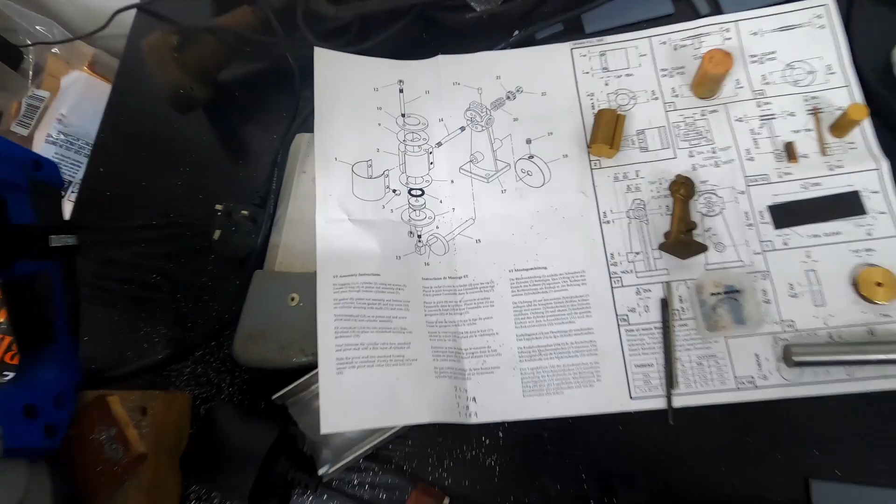So next up, I'm going to take a look at the main body here. Looks like it's probably likely to be the most difficult part. It's just a case of working out how to hold it and the order of operations.

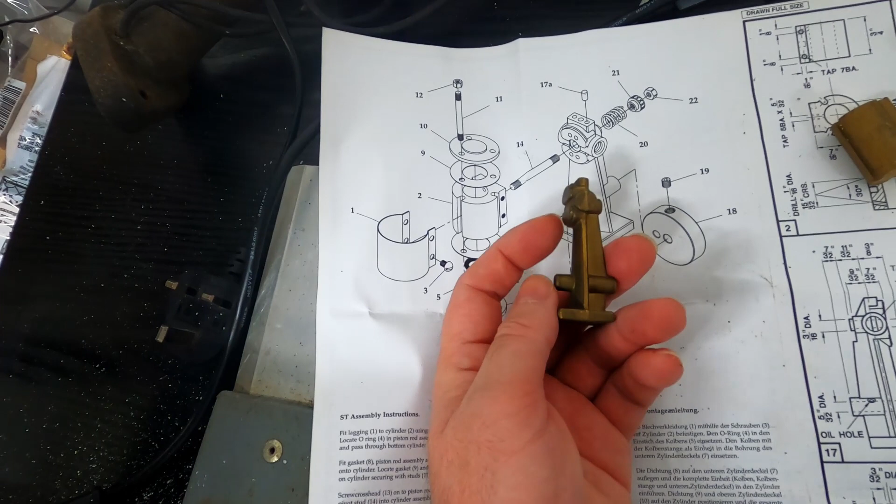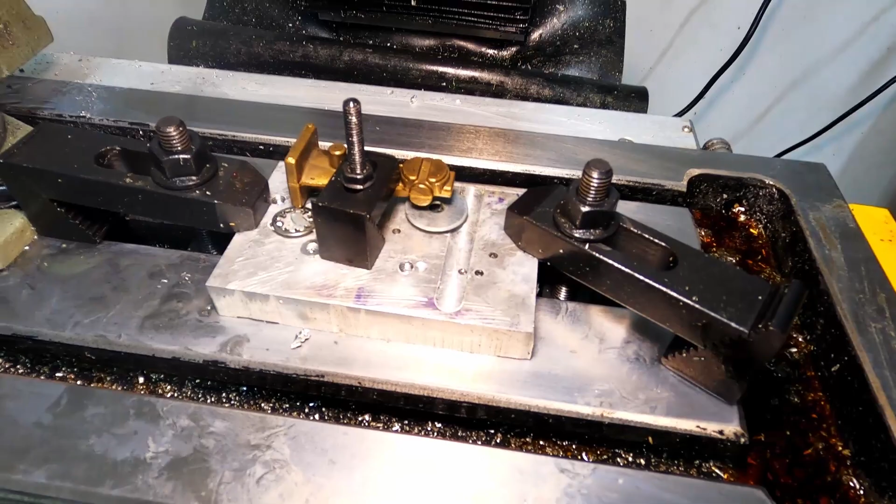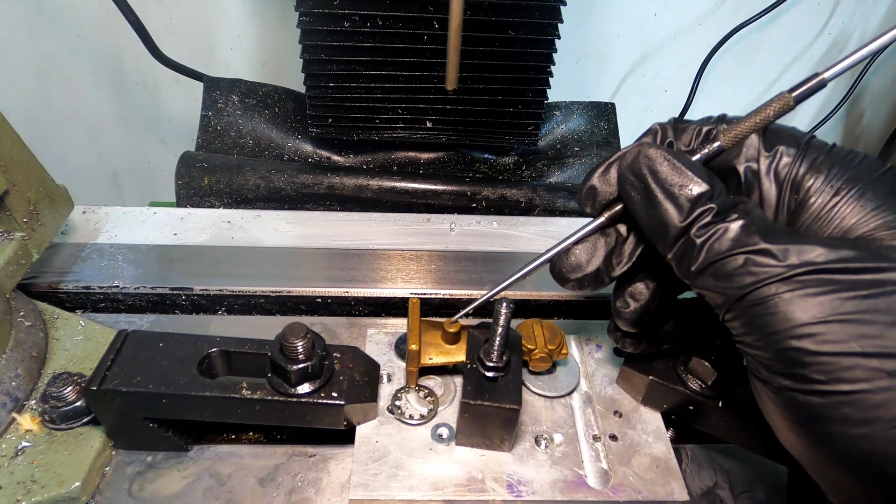Okay, so I have the main body clamped down to a bit of scrap aluminium on the bed of the mill. And I've lined it up so roughly the center of this feature here aligns with the center of this width here, because there needs to be a hole drilled through here and a hole drilled through the center of there, a specific distance apart into the middle of the part.

So I've got this as vertical as possible, so hopefully it does come out in the middle of the feature the other side rather than out the edge of it. So the aim here in one operation will be to drill a hole through this feature, which is where the crankshaft goes through, drill a hole through this feature here, which is where the piston rotates, which means both of those bores or holes will be aligned with each other,

and then in the same setup skim these top surfaces here so that they're exactly 90 degrees to the hole, so that the cylinder has a good fitment to that, and then cut this off as well to the right height in relation to this. And then what I want to do is trim the ends and trim the bottom so that I then create reference surfaces in relation to these holes. And I think that's the only operations I need to do in this setup.

Yeah, well, this can only go well. Olive oil.

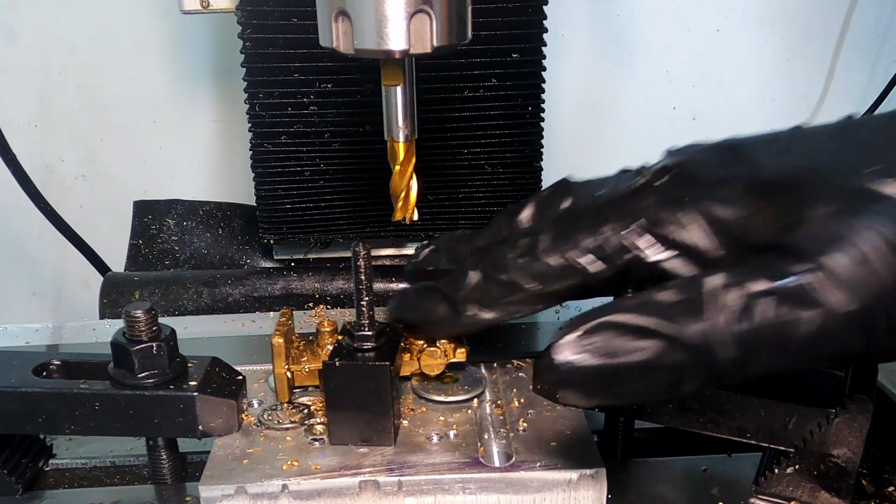Okay, so let's try and clean up this face here. Maybe needs a touch more, 0.2 more.

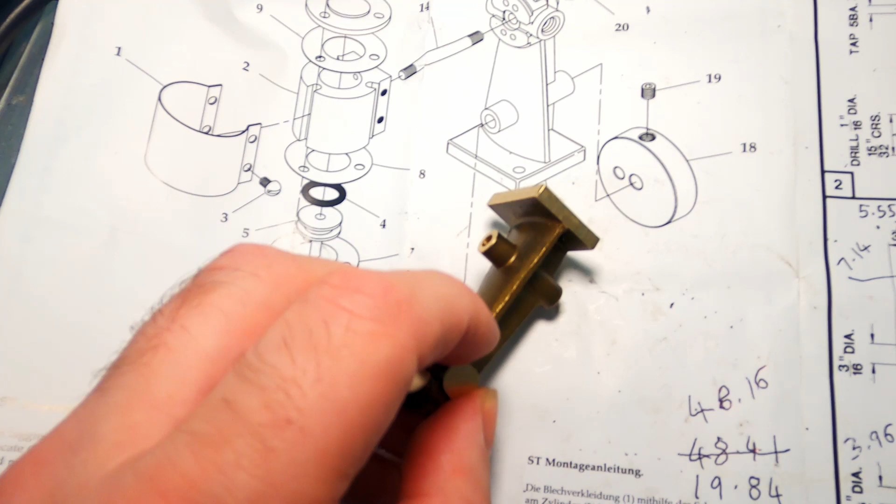So how did we do? I guess you won't know until we try and fit other parts to it, but the hole there is not entirely central to the feature, but close enough. Did that by eye, so not too surprising. And it came out in the back in the feature, so count that as a win.

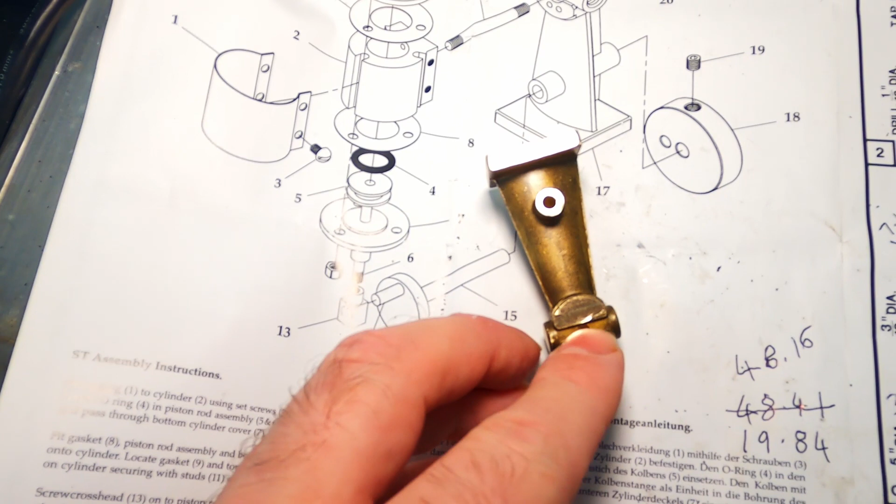This one looks a bit better, and that was purely just a coincidence because that was measured on the DRO from where I drilled this hole, drilling out to the hole with the dimension there, and that landed right in the middle of those two flat features.

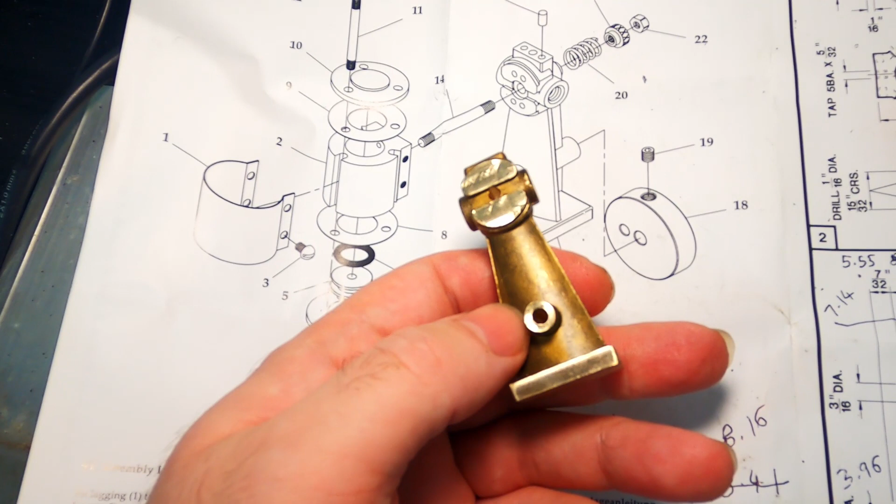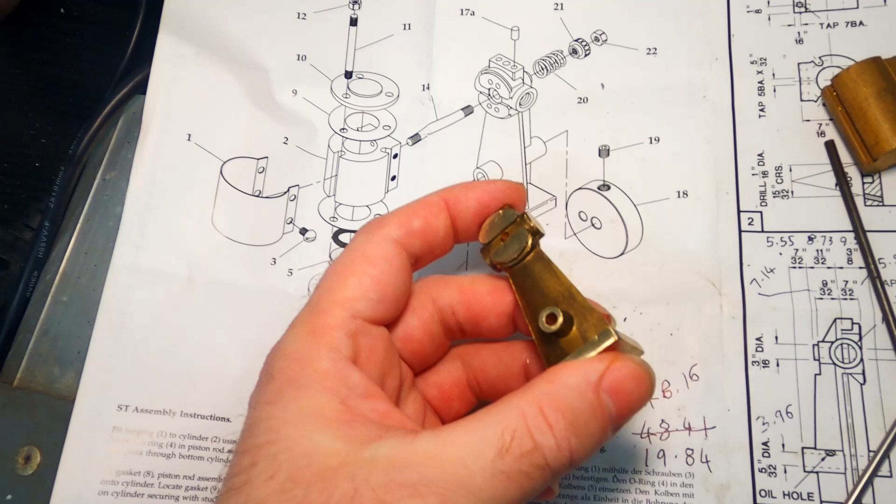So that's all I'm going to do on that for now. The rest of the features I think we'll have to wait until I've got some more parts ready and see how it starts fitting together. The passageways for the steam, probably going to be the most critical. So I'll do that once I've got the cylinder made, see if I can't get them to actually line up, which is probably key to getting this working.